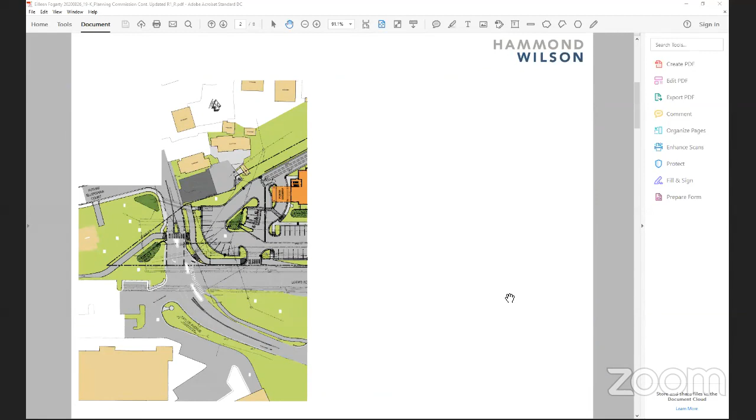Since we last met, this team has been very busy responding to the Planning Commission's comments and questions. As you'll see from these two diagrams, which Terry will go over in great detail with all of you, we've identified all of the pedestrian and safety measures for either option, that is the island or the circle. Terry will walk through that with the entire commission so that it'll be very clear.

He will also be responding to the stormwater management and pervious paving questions raised by the commission. And we have also added a condition that will enable the planning staff to work with the applicant on the details should the circle move forward.

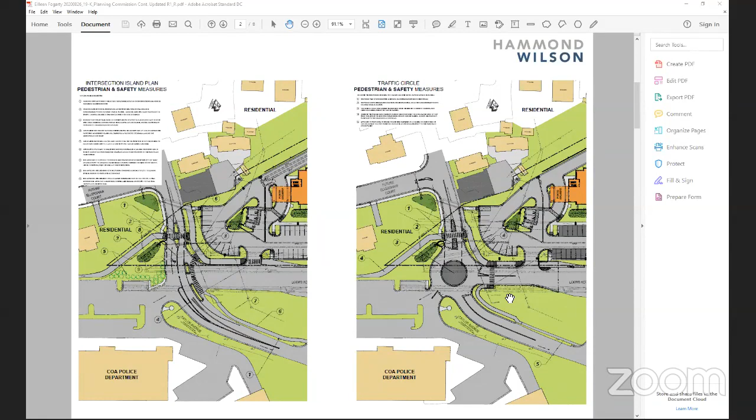Terry, slide number 3. On this slide, you see the image that you've seen before on the bottom, and that is the transition. The reason we have that image is to remind all of us how we got here. We have several letters of support from the community, including one from Bike AAA, from Jon Korin, the president, making specific recommendations, all of which we will be incorporating into the project.

We also have a letter from Mr. Erber, and both Terry Schuman and I will be addressing his comments. But as the commission looks at the public support for this project, it really reflects the very early commitment by the applicant to go out into the community and meet with the neighbors and the adjoining properties.

And also we had a widely attended community meeting last October. But I think the most important issue, for the commission's consideration in the future with projects, is that the applicant and the city work together to redesign the project as your comments and the community's comments came in. The entire project was redesigned, and after it was redesigned last fall, extensive changes were incorporated to reflect what we heard from the commission, the community, and the planning department. We will continue through development and construction to work with the community in the same kind of relationship.

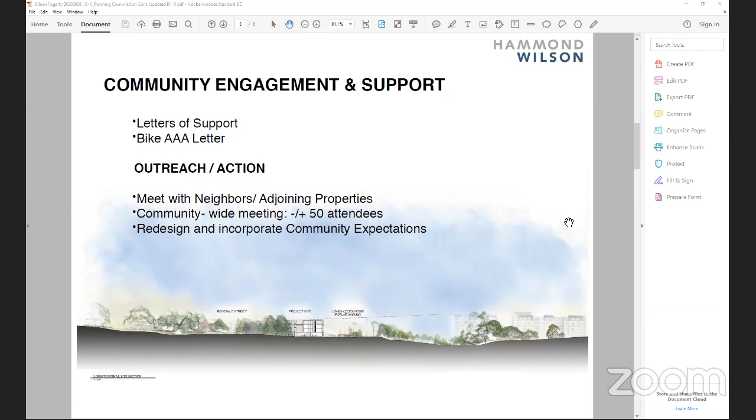Next slide, Terry. As a result of these ongoing efforts, what you have before you tonight is a project that has a compatible land use, that is, first of all, in full compliance with the comprehensive plan. It meets, and in most cases exceeds, the planned development and site design requirements, but most importantly, it meets the community expectations and benefits. To respond to one of the letters we received today, I wanted to borrow from the comp plan language: respect and enhance the character of the surrounding community.

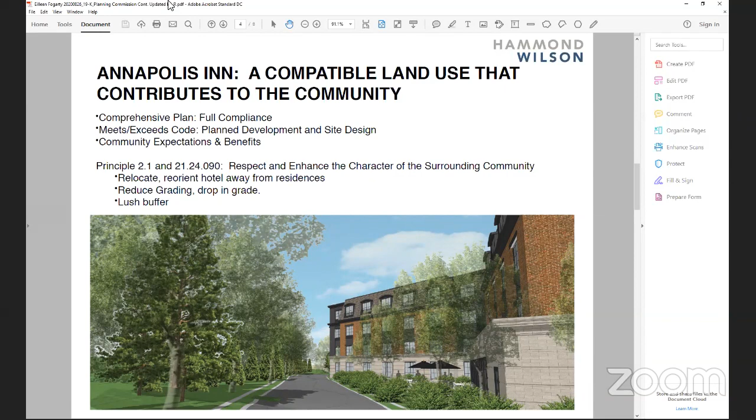Let's go to the next slide. When you look at the next slide, what you see is a 4-story building. The first story and the porte cochere for this building are basically below the level of the adjacent neighbor's street. So what that means is the cars you see there coming through with their lights, any of the activity, that is all below the level, below the grade for the adjacent neighbors.

And as you can see, and Leo spent a great amount of detail with all of you at our last meeting, it's not just the siting, so that you basically have a 3-story building, but the articulation and the detail give us a very human scale building.

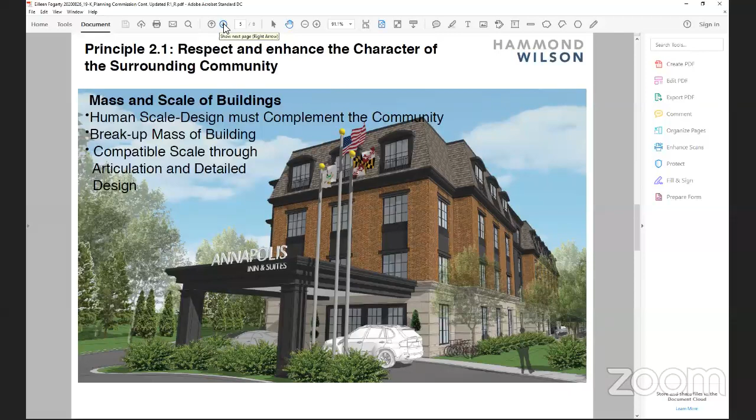Next slide, please. On this slide, we wanted to respond to the overriding issue in the comp plan, and that is for a sustainable future: economic sustainability, environmental sustainability, transportation. From an economic standpoint, this site is an underutilized infill site, and the hotel will offer the city the maximum revenue from lodging and property tax, $500,000 a year.

From an environmental standpoint, we have a project that currently is on a site that has no stormwater management. This will meet, and in most cases exceed, the stormwater management requirements, with treatment of 98% of the impervious area. But it also, if you recall, from an environmental or visual standpoint, we will be undergrounding the very large BG&E utility line. Next slide, please.

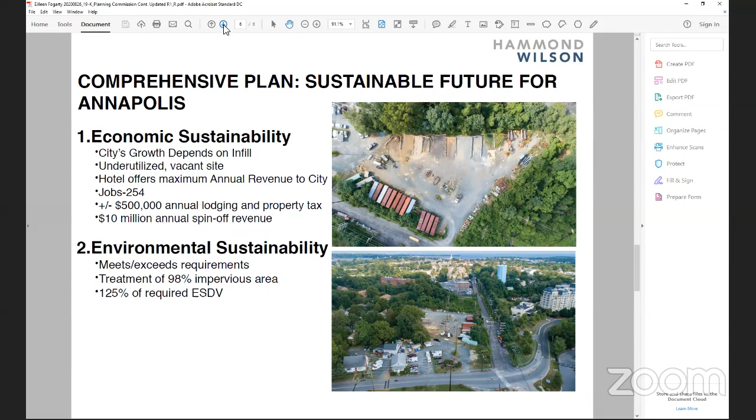The project's one of the most important features is that it supports and improves the transportation network envisioned through the comprehensive plan, the bicycle master plan, and the recreation plan. You're going to see in detail in just a moment from Terry: sidewalks, pedestrian activated signals, crosswalks on Taylor, safe connections to Poplar, and very importantly, speed reduction and improved traffic flow through either the circle or the island.

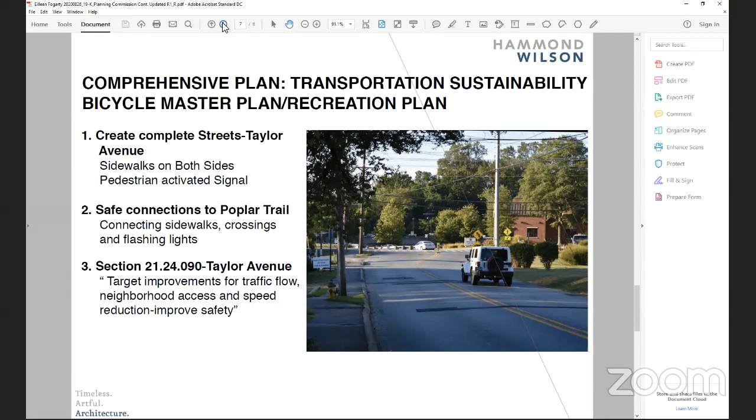And the last slide. So in conclusion, what we would like for all of you to consider is that this project will benefit the entire community. It benefits it by investing in Annapolis's future and creating, first of all, a successful transition from residential to commercial, and secondly, a proud gateway. Thanks very much.

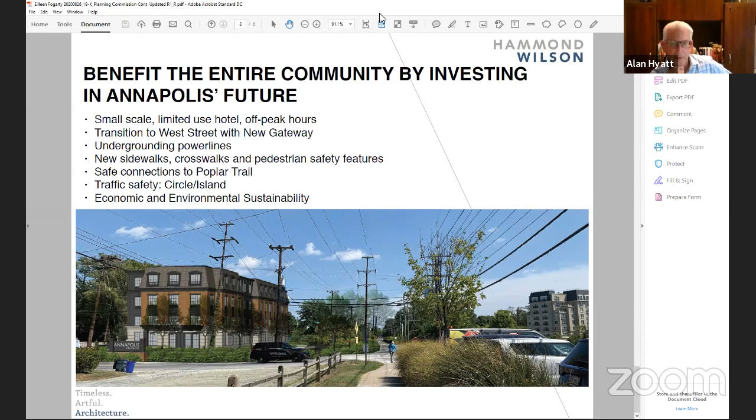I do. Thank you. Thank you, Eileen. So, Mr. Schmid, you recall that at the last hearing, we proposed 2 methods of mitigating traffic, right? We had the island plan, or what I call the alternative plan, or the roundabout or circle, right? You recall that?

Terry? Terry, you might be muted.

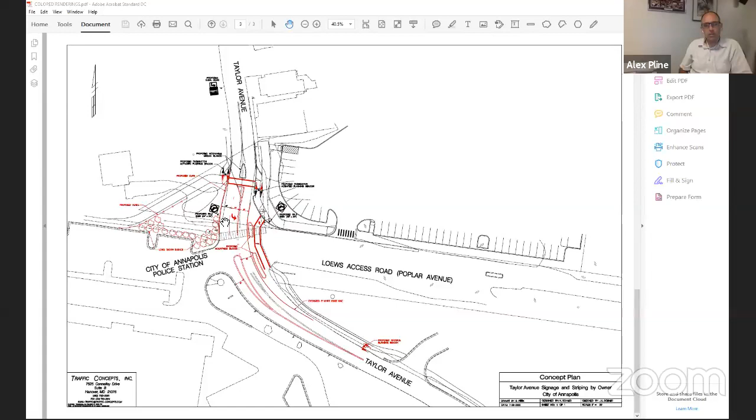Question: going back to the circle plan, the cut into the parking lot doesn't have any striping across the trail—is that an omission? In the island plan, going back one more, it has striping across, so I assume that's just an omission and the striping would be there in either plan. Response: Yes, we would provide striping. The circle plan was an early plan, and then we went to the intersection plan, so it was omitted. That's fine—just wanted to make sure it was an omission and not something intentional. Not at all.

So, Mr. Schmid, one item I wanted you to address before we finish: there was some discussion at the last hearing about the volume of asphalt on the site compared to concrete or even permeable pavers. Could you discuss how that relates to the site and proposed stormwater plans for this project? Yeah, absolutely.

Early in the design we looked at alternative options for pavements and stormwater, and we were looking at permeable pavement in this area. But as you can see from the aerials, it's a compacted urban land complex—the soils are very compacted, with very little infiltration at all. So, working in conjunction with DPW and the stormwater management engineer, since we couldn't get permeability on this site with permeable pavement, we ruled it out.

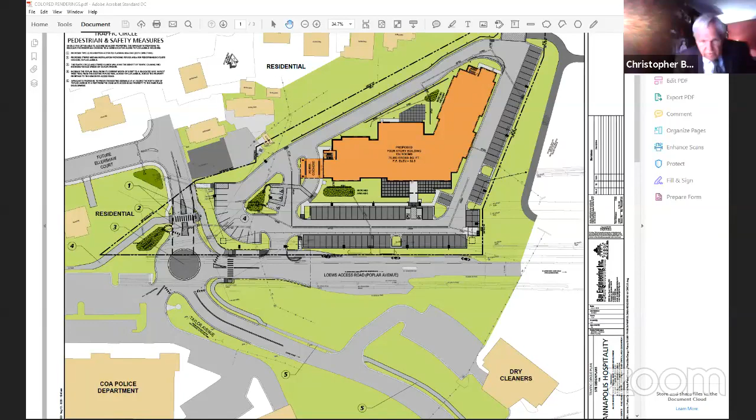And the amendments are not so major as to require a public comment period. Right, and they've been given adequate notice for tonight's presentation to the public. But they're not allowed to make public comment against these new items. But the items are minor in nature, as Mr. Baldwin alludes to.

Mr. Hyatt, do you know of any reason you could not wait till the 23rd, I believe, which would be the 4th Wednesday in September? Or do we meet on the 30th of September? I believe it's the 23rd. So that'd be the 23rd or the 3rd. Those are the 2 options we're talking about right now. The 3rd being in another week and change, and the 23rd being 3 weeks after that. Mr. Hyatt? Mr. Chairman,

I can't think of any reason why you couldn't vote on it tonight. It's not unusual to have changes made throughout a process, and it's not like we've come up with new concepts. There were 2 options proposed throughout this process, the circle plan and the island plan, and we just added a few features, pedestrian enhanced features. So I think Mr. Beard agrees, there's no need to delay. Can we wait to the next meeting? We could, but we would rather not, because this has really been a lengthy affair up to this point. So my request would be that you proceed with your deliberations tonight.

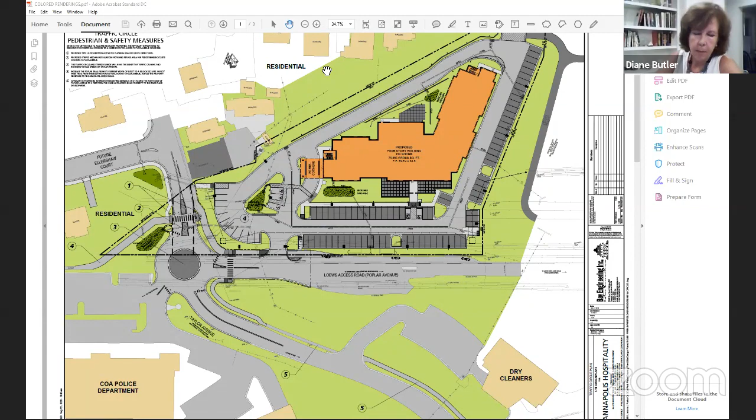And then my other question is, did you talk to the city stormwater engineer about the prospect of using permeable concrete or permeable pavers? A lot, yes, very much a lot. And does he concur that because of the compact nature of the soil, the D soils, that having permeable concrete or permeable pavers would not work? I pushed very hard to get permeable pavement. There's a little bit of a difference of opinion between me and him on it, but he is dead set against allowing us to do permeable pavement. So we tried.

Okay, great. And then the other question I have came to my attention just by reading the comments from Rick Erber, and I thought we had dealt with this, but now I'm not sure. There will be a sidewalk that connects from the crosswalk in front of the hotel up to the Naval Academy Stadium, correct? No. No.

No, there'll be a sidewalk. Do you see the screen? You do, right? I do. We have a sidewalk connection, and we have a frontage sidewalk that connects up to the existing sidewalk along Taylor Avenue. So, well, there's an existing kind of minimal sidewalk.

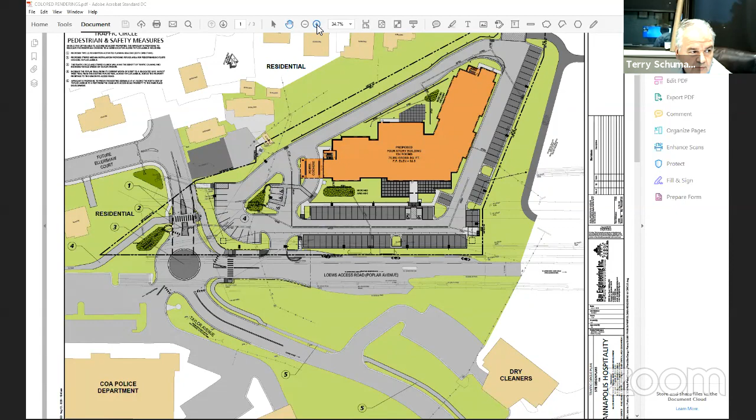We will connect that sidewalk to the trail on the west side of Taylor Avenue. But the Terrapin Station, if you look at my screen, they're providing a little curb return on a sidewalk, and that's all they're providing. Oh, wow, that's pretty insufficient in my mind. If there's one public benefit you could give us right now, it would be to work with Terrapin Station to make sure there is a nice wide connection between your hotel and the Naval Academy Stadium.

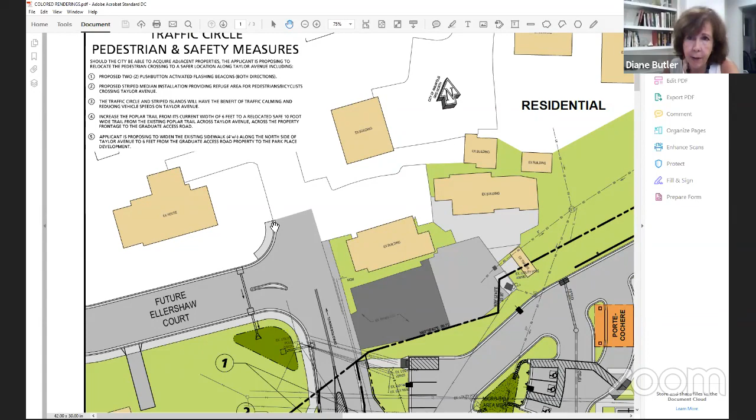I'm sorry, I thought this was already in the works and was done. It wasn't until I just read the comments from Mr. Erber that it came back to my attention. He says, we would like to see a more comprehensive plan integrating pedestrian flow to the funded, constructed areas by both developers. Such a gesture of goodwill for the benefit of the communities in which they are building will speak volumes to their commitment to the community. Eileen is very much aware of public benefits and how we need to start building them into these developments, so maybe it's not too late for Eileen and the team to readdress this, because I do think it would be an important gesture, and for safety purposes, a good idea.

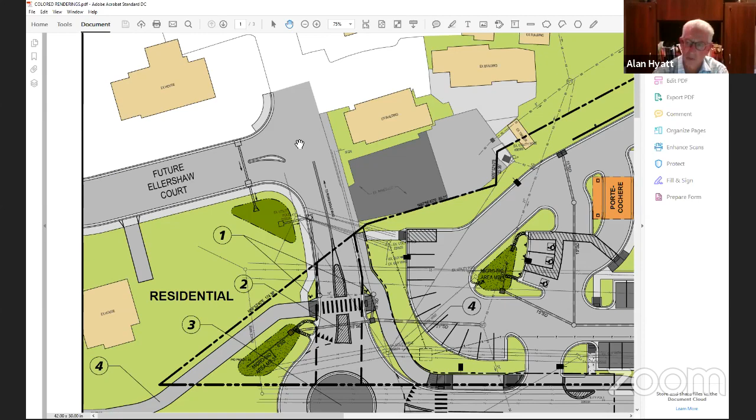Alan, if I could respond to weigh in. Go ahead, do you want to explain about the financial contribution we're making? What the applicant agreed to do was make a very significant financial contribution to the city, and out of that contribution, there would be improvements. This is in addition to everything you see. Everything that Terry has laid out and Ken has laid out is going to be built.

In addition to that, the applicant, if the circle did not go forward, proffered a sizable amount of money to the city, and out of that, the city could make improvements. My understanding, but Alan can address this better, is that this is someone else's land. The applicant has proffered money to the city. The city, theoretically, if they wanted that sidewalk and could not get it from Terrapin, could build some of it out of the money the applicant has proffered. But the applicant is not in a position to go and build something on someone else's land.

Alan, is that a fair summation? That's right. Part of the APF requirement is that there be this financial contribution, and the idea was that it would go toward sidewalks. But in order to install sidewalks, there are several parcels between the Terrapin Station and Cedar Park Road that would have to agree that the sidewalks could be installed on their property.

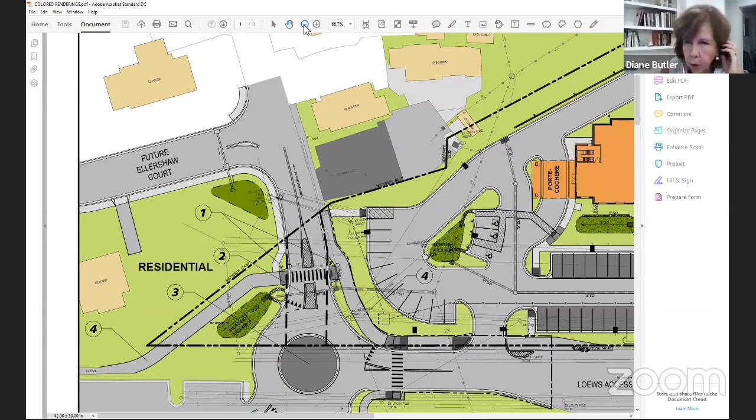And Mr. Hyatt, did anyone approach those property owners to see if they would agree? Diane, hold on a second, this is the chairman, I've got to step out for about 3 or 4 minutes.

So like a small amount? We didn't do that, I don't know if the city did or not, but we contributed money, or will have money contributed, that will go toward the construction of those sidewalks. Can you tell me the amount of money you plan to contribute? I think it was $25,000. I'd have to take a look because it's based on so much per lineal foot of sidewalk. I think that's what it was. Alan, it was $20,000, and that was an estimate.

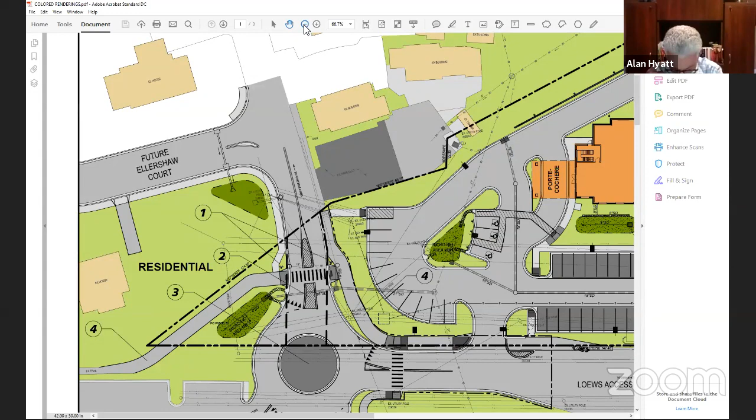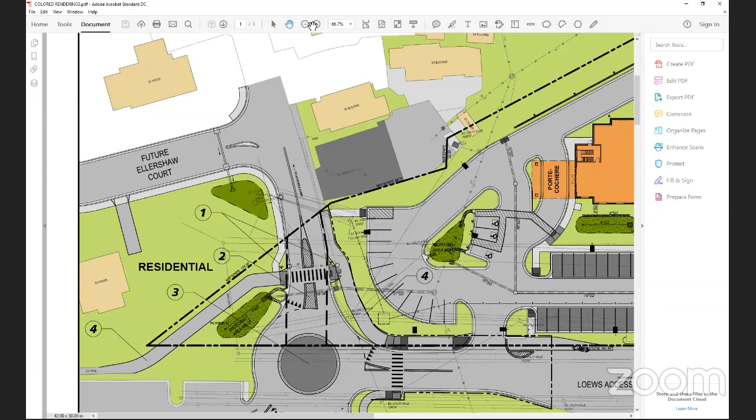That's for the sidewalk, this is Eileen. In addition, there was a large amount of money if the circle did not go forward that would go to the city, but the amount the sidewalk would cost was $20,000 to $25,000. That's right, it was estimated at $20,000 to connect from the end of what Terrapin, what is it called, Terrapin Station, to Cedar Park.

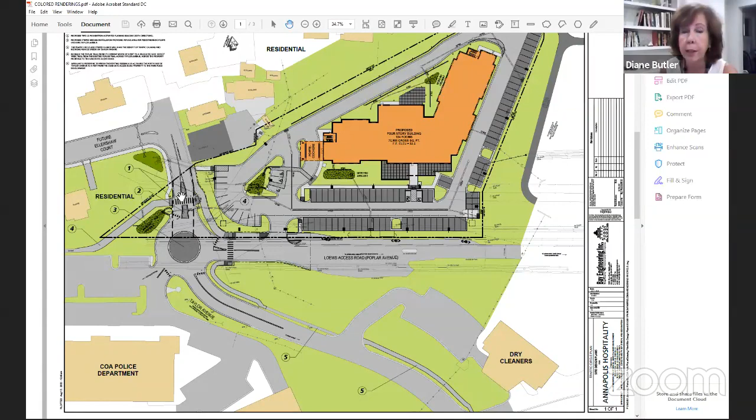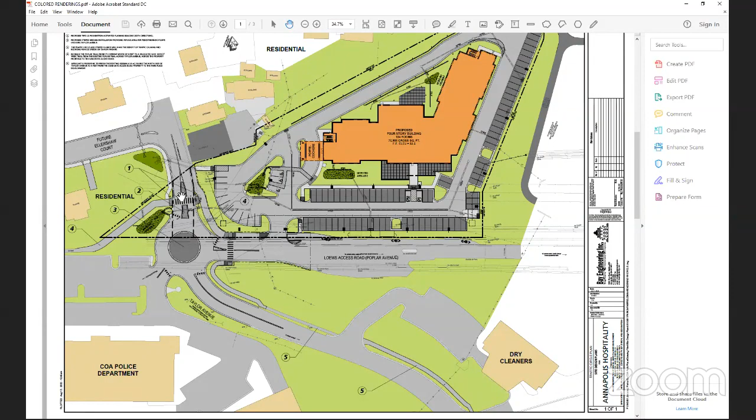So Sally, you think that $20,000 is an appropriate amount to build that sidewalk, and you think the money is going to be dedicated for that? It's just that we're not requiring the developers to do it. That money won't be diverted to another project by DPW? Is it earmarked for this, I guess is what I'm saying. It is, the purpose of the money is to fund acquisition of right-of-way and construct the sidewalk for that section of Taylor Avenue.

Okay, thanks. So while we're on this subject, what are the conditions to this financial contribution?

So Bob, it's in their adequate public facilities mitigation plan, attachment D, and there are no conditions on that particular one that I see. Just that the developer shall fund the acquisition of right-of-way and construction of the sidewalk, provide the pedestrian activated signal, and provide a clear connection for the extension of Poplar Trail in cooperation with the Department of Public Works. Those are their non-auto transportation adequate public facility requirements. And that's in either event, Island or Circle. Correct.

And is the amount specified in the attachment? Yes, in attachment D. D as in dog, and it says up to a maximum of 25? No, it says $20,000.

Thank you. That's all the questions I have on that subject.

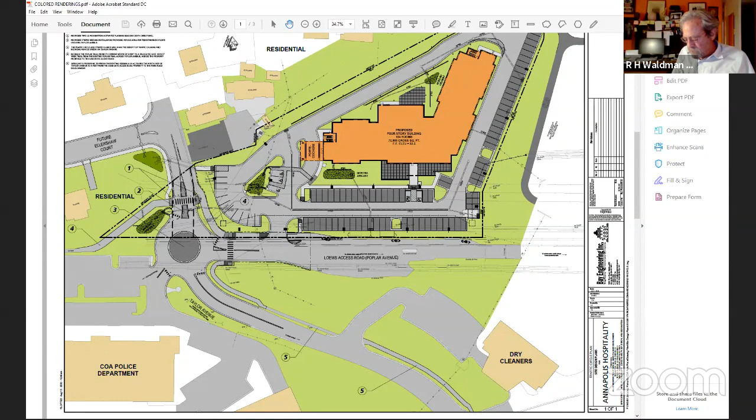Whoever is in charge of the evidence on this, and perhaps Mr. Hyatt, you do that, and you would send it to Ms. Hook or through Dr. Nash or Mr. Smith to see that that is corrected, because I think it's going to become part of the record, and I want to make sure that's clear, okay? Yes, sir, I'll take care of it.

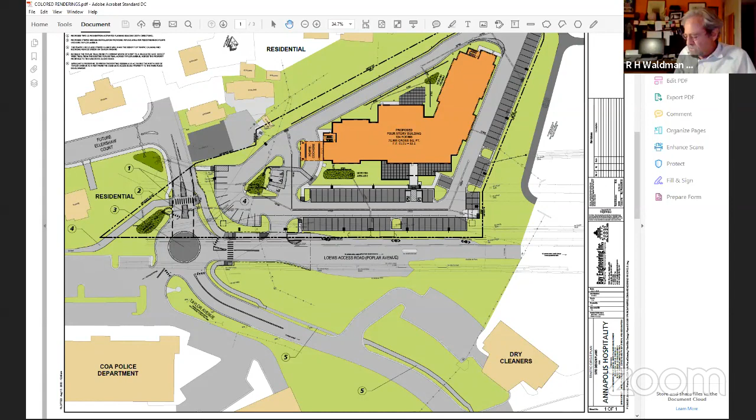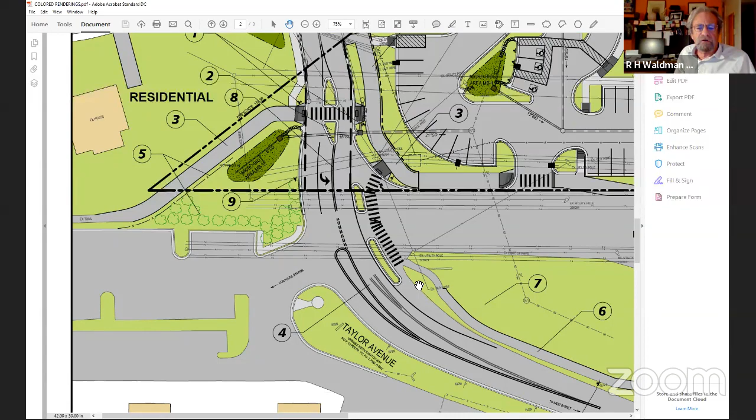Following up on that same topic, left turn lanes out of the access road in the event of the island plan—let me see if I can understand what is there to prevent or provide significant negative reinforcement here to stop left turns out of the access road. What is there to stop people or delivery trucks from just veering in between those two islands and making a left?

So the mountable curb, the northern of those two little islands, right? To what extent can that be extended or expanded further into the right-hand lane on Loews Access Road? Can it be extended further out? Probably could. We'd just have to run checks to make sure vehicles don't have to run over the mountable curb. We don't want to make it too narrow that they do it really slowly and wind up getting hit, but we could look at making that a little bit longer.

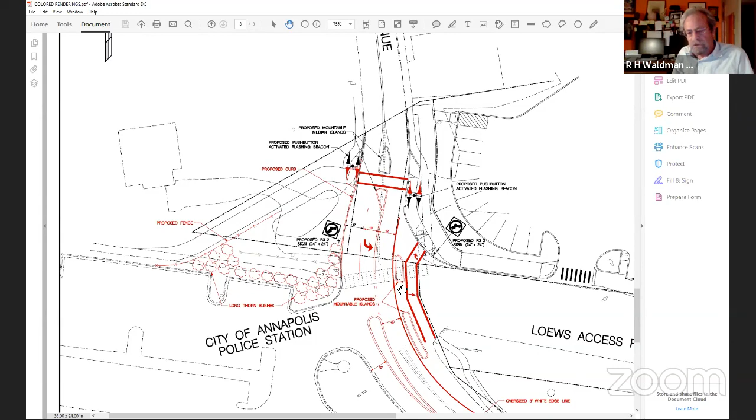Now, if I could, Mr. Schmid, and both of you—I want to applaud you for the installation of a third pedestrian activated signal further down Taylor Avenue, further down the hill towards West Street. I have my fingers crossed that it can be connected by, I don't know, Bluetooth or radio or something, rather than having to run a line. Although I do note that you're changing the sidewalk, so maybe you can do that at the same time. That's up to you, but I really applaud you for that.

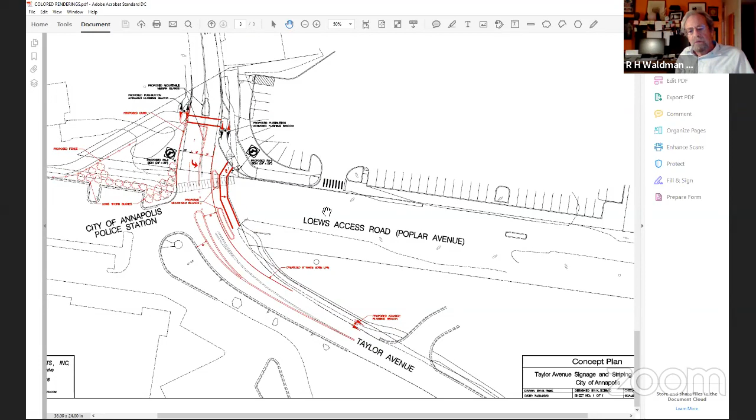What I question is its placement. I am not a traffic engineer, but common sense and my intuition tell me it might be better placed further up the hill rather than so far down. I could argue it both ways, but I'd really like you to consider the efficacy of putting it further up the hill.

I know, we can look at that. It really is based on speed - depending on the speed, you put it back from where you're trying to warn of the crossing. But I think we could move it up the hill a bit from here. I just think it should be placed in its best spot. It strikes me as way down the hill - somebody coming up sees that flashing light but doesn't see anything around, you know what I mean?

That's the one thought on the light placement. We'll have a sign on those light standards that say crosswalk advanced 200 feet or whatever. I understand that. It becomes a little difficult though, because if we approve this according to the drawings submitted, I don't want this to be necessarily set in concrete, whereas I want other things to be set in concrete.

If I can follow up on that, Bob - just for Mr. Schmid, I think the spot Bob's referring to, there happens to be a no parking sign which would be on the hill. That's a good reference point for where it just intuitively feels right. Okay, give that a thought.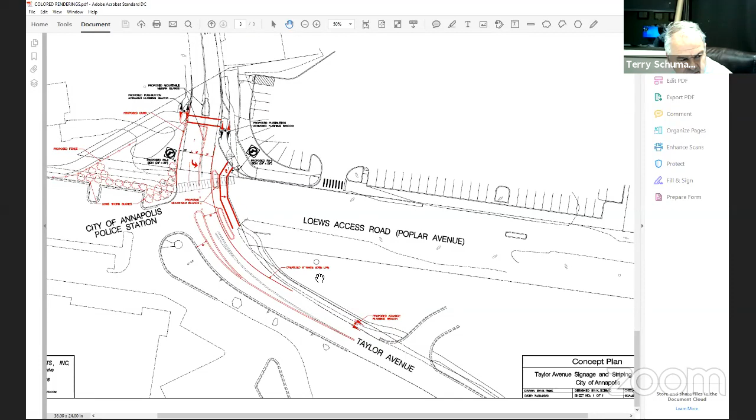Are you going to be grading or doing anything further down that way? We're really grading - if you're familiar with the area - this area up in here. Okay, how expensive would it be to relocate that sidewalk 5 feet from the curb? Just money, it's not an exorbitant amount. I think it was built in the beginning too close to the curb.

It's a detail that escaped us when we approved Park Place, and it's something I would really like - personally I'd like to see it moved off 5 feet. It's really close to the road, it's very uncomfortable.

Okay, what would we call that sidewalk? Taylor Avenue sidewalk - buffer. I don't want it to be confused with the Taylor Avenue sidewalk over the top of the hill - be called a grass buffer. But what do we call that stretch? Taylor Avenue sidewalk, access road to West Street, southeast side. Okay, 5 foot buffer. Okay, all right.

If I could move on, I want to applaud you for several things you've done which I think are excellent. I'd suggest you consider not only a fence at Taylor Avenue for the potential shortcut for the path, but also a fence that runs right alongside the path. It need not be a major fence - it could be the same kind of post and rail that's even up there now.

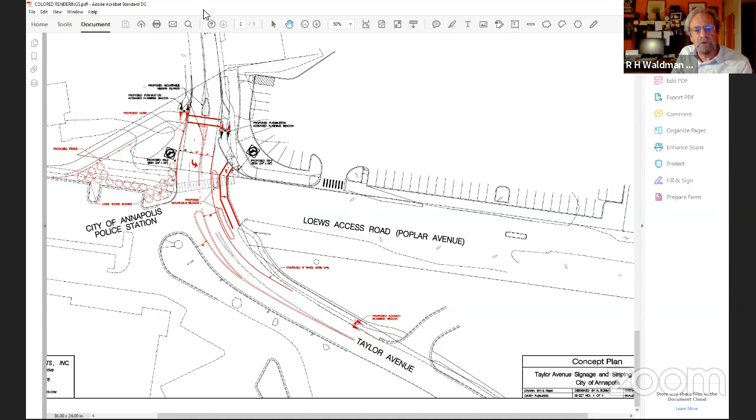Need not be expensive, but I think as much as possible we should divert people from trying to make the shortcut. I applaud Ms. Schwab's choice of probably pyracantha or rose bushes or something that'll stop people from coming through. But as long as we have to live with this 25-foot distance or however many feet it is, this diversion - I think we really need to make the point clear. So I'm going to suggest and move that there be an additional fence along the pathway.

And I guess, Bob, just look at the cursor. So we were proposing a fence along Poplar. I probably didn't explain that well. I missed that. I thought you said only along Taylor. No, I might have said that, but I should have clarified that we were providing a fence here along Poplar.

So what are you doing on Taylor? What do I see there? Just really long thorn bushes and landscaping. But we could put a little split rail fence or something up along there. As long as you put it off the road, back a few feet. Right, yes, and rose bushes and pyracantha, so.

Okay, Mr. Schuman, thank you for clarifying that. Next point is, who will be responsible for maintaining the lights and this landscaping here across the road, and those are the two most important items. And striping, I guess, over the years. Who's responsible for this sort of thing? Is the landscaper going to be responsible?

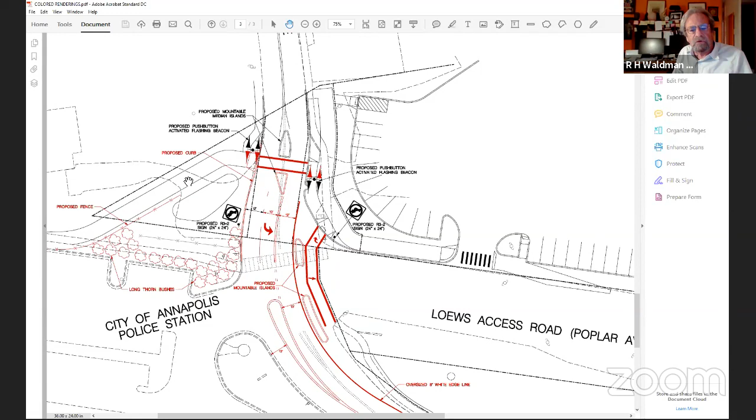Yes. Now, if I could move, Mr. Schuman, if you could give us either of the slides. Hey Bob, can I interject something first? If you're going to vote on this, you certainly want to achieve clarity of responsibility. I'm just making notes, Mr. Beard, and I'll make suggestions as to conditions. I'll move several conditions, okay? Yeah, no, I got you. This is not just a handshake agreement. Thanks for reminding all of us.

The comments from the neighbor, I thought were very well taken and very well spoken. And he's rightly, I think, concerned about lights leaching into him, probably his bedroom, from cars coming into the porte cochere at night.

To me, there seem to be two potential solutions. One of them is to reroute the flow of traffic so that it's clockwise. I don't know that that works, but the second solution might be to actually build a fence along the boundary that will be light reflective or light opaque. I know that you were planning on doing some fencing. It may be that, when I learned tonight from Ms. Fogarty that the first floor of this structure is actually lower than the neighbors to the north, it occurred to me that a fence could be very effective at a fairly inexpensive price.

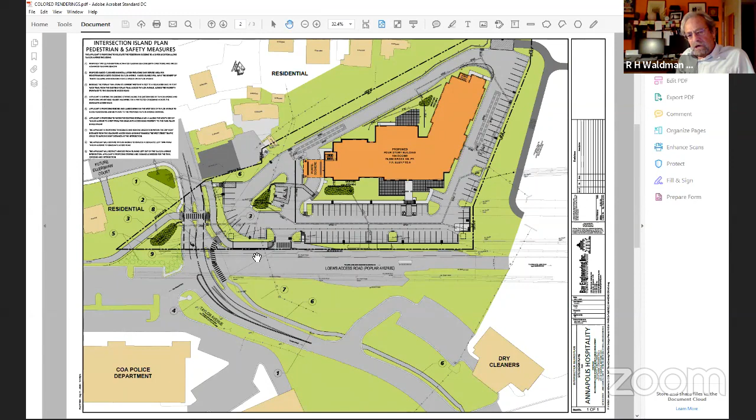Do I get any comments from the applicant on that?

Bob, this is Eileen. Let me explain what you've got. Deb Schwab did a drawing, though we're not in a situation to put it up, but basically the cars are below the level of the neighbor's property, since there's a 7 or 8 foot lower grade there. So the entire car, including their lights, is lower than the adjacent property. Then you add the retaining wall, and you add the buffer.

So it says fence wall. What is that? That's a wall. This is Deb. There's a 4-foot fence on top of the wall, and then there's planting from the fence to the property line. So there are several levels of things going on, if you look at that little diagram.

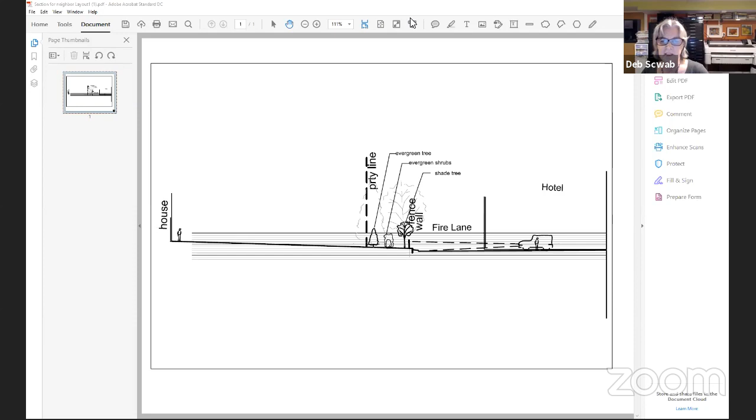From this side view, it actually looks like the first and second levels of the hotel are not below grade, as was briefed earlier. Well, if you look at where the neighbor's house is—this is kind of a compressed scale—the finished floor of the hotel is about 3 to 3.5 feet below the elevation at the base of the neighbor's house, which is around 36. It was briefed that floor, which is around 1 and 2 of the hotel, were below the grade of the adjoining property.

The existing grade at the houses is around 36, and the proposed finished floor of the hotel is 32 point something. And the lowest grade of the houses on that street is 36, correct? The backside facing the hotel—I don't know what their finished floors are, I just know the grade at the backs of their houses is around 36. So that's the lowest grade of all those houses, right? That's the one, but I can't point.

Terry, you can point to the one where I did the section. Can I just interject for a couple—sure. This is Mr. Erber's house right here. There's another residential house here. This is Heidler's Plumbing Supply. So the house that wrote the letter is this house.

Uh-huh, and a long time ago, this was our entrance to the hotel. When we brought Leo on, one of the first things he did was move the porte cochere here, with a right-in, right-out, typical traffic flow for drop-off of visitors. But when we did that, we also extended the wall.

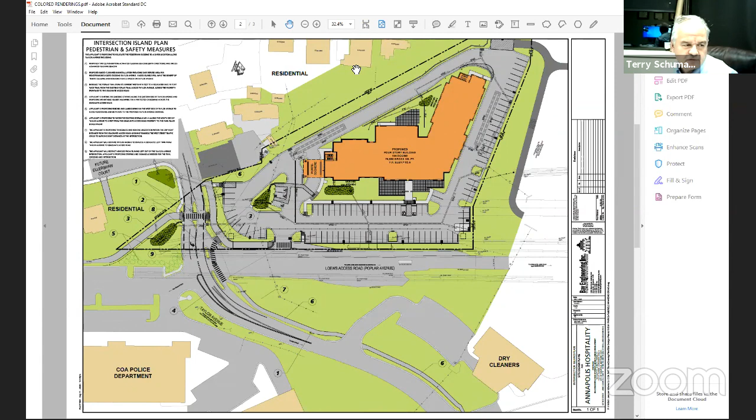We do have a grade differential, and for sake of distance, the point from the house to the porte cochere is about 160 feet. And as we said before, this elevation is probably about 5.5 feet higher than the first floor of the hotel. So the back of the house, where you step out, the rear floor elevation, is about 5.5 feet higher than the first floor of the hotel.

But how high is the wall along the retaining wall, or the fence, pardon me—how high is the fence on top of there? So the wall is approximately 2 feet. It starts at 0 and goes up, probably 3 or 4 feet in the middle, but around this area right here, about 2 feet high.

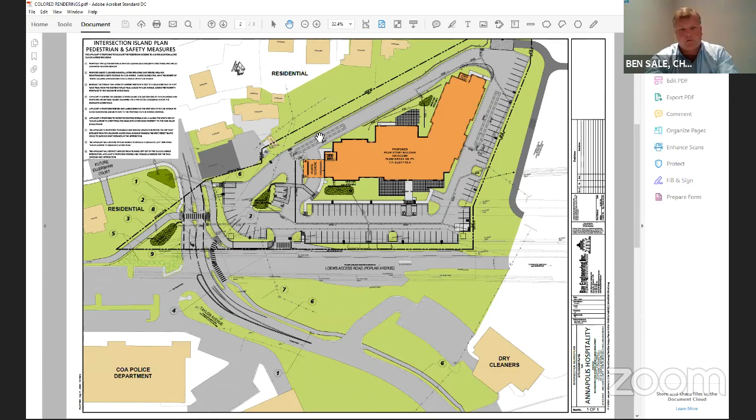Could you zoom into that area a little more? We don't need the bottom half of the drawing, maybe more of the top half—that'd be clearer. And just go right, thank you. Again, the subject letter house and this—so this wall in this area right here is about 2 feet high.

And then on top of that wall we have a 4-foot high fence. What we did—we extended the wall for that purpose where the porte cochere was, to help screen the headlights. We also heavily screened with evergreens and shrubs, not just shade trees, that didn't have any vegetation below the branches. So we tried to heavily screen this for that purpose.

So, okay, and there's a 4-foot fence above the retaining wall. Yes, that's correct, so there's a total of 6 feet at a distance from the porte cochere. I would think a little bit higher than that would be better on that whole side. But after that fence, to the north of it, you've got the green space and then the property line. So at the property line, what else is there?

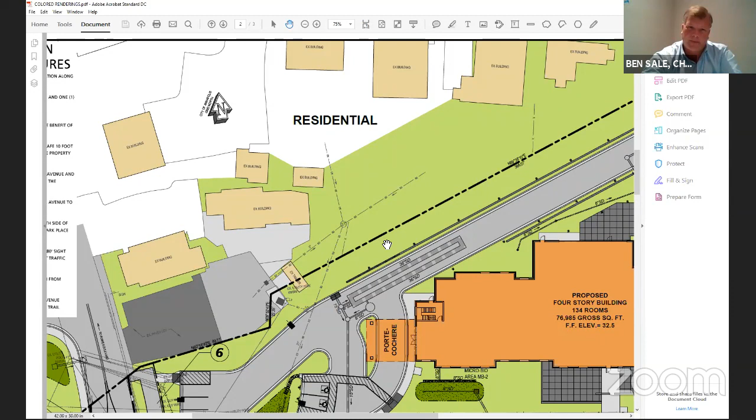Vegetation. It's just vegetation, no additional fencing planned as of right now. What kind of fence is on top of this retaining wall? Have you thought about that?

I was thinking something a little more decorative, not a board on board fence. We don't have an exact detail yet, but it would be a screen type fence.

What does that mean? Trying to block light, it wouldn't be an open fence. Putting a fence along the property line is difficult because some neighbors already have fences on the property line, and there are also existing trees that we're saving there.

What would a 5-foot fence do? It's 1 foot above 4. It would hide all the landscaping that we have going on.

I would just think higher is better in that regard, but if you guys have looked at it and feel otherwise, especially when you have 2 feet below the adjacent property.

I don't want to go over you, Mr. Waldman. I want to let you finish first before I make my comment. No, actually, I think I'm done. I appreciate your patience.

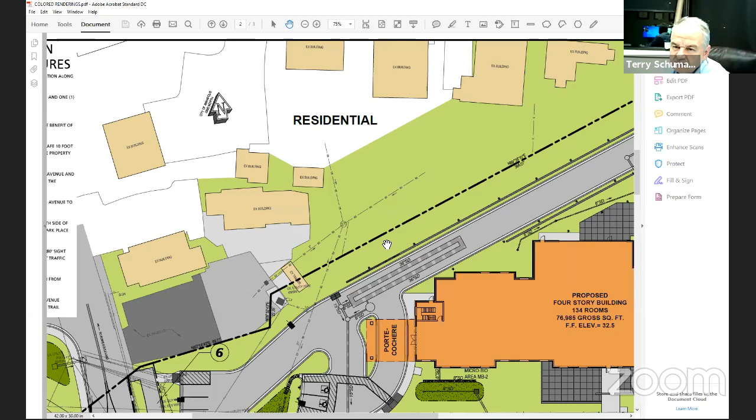So concrete would reduce your need for lighting at night and reduce the amount of heat maintained by the pavement and radiated at night, making it a very hot parking lot during summertime. We don't have anything in our code that stops you from putting asphalt. I have to say, from a design perspective, if I owned the property I would definitely go with concrete versus asphalt, just for the heat perspective, let alone the pollution perspective of needing to recoat it. I've just seen it too much.

I know you have stormwater management procedures in place, but the slow leaching of asphalt over time off these pavements - I've seen it a lot on West Street on properties done near Spa Creek, even the old school buildings, and it's quite disheartening. So I know there's a chance to change it, but also the lighting - since you have asphalt, you will need a decent amount of lighting. I wanted to go over the lighting on the north side of the property that abuts the residential area.

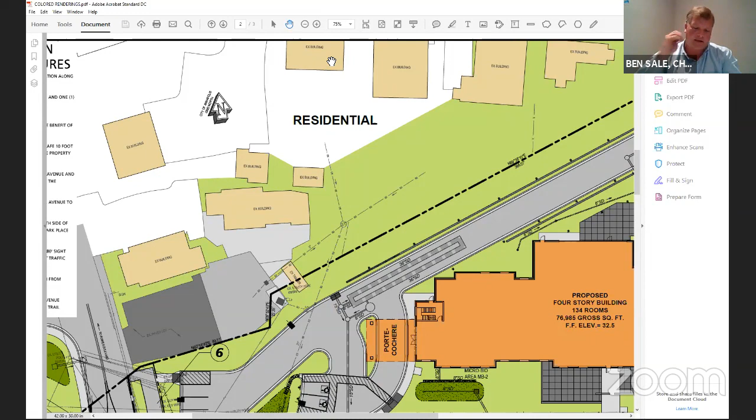I know you've got a lot of trees that will stop some of that lighting. Can you tell me how high those light poles will be and where they'll be located? Also, will there be lighting on top of the building pointing down towards the north side?

From a lighting standpoint, you can see these darker rectangles - these are the tall light poles with downward lighting. Up along the residential area and along this area, those lights will be - Deb, you can weigh in - I think they're 3.5 to 4 feet high, just kind of pedestrian lights. Yeah, those are what we call bollard lights, more typical of what you'd see along walkways. You've probably seen them, kind of waist height lights, and the fixtures on them are meant to light down as opposed to up.

Is there any lighting on the top of the building facing the green space between the building and the northern road? That's for Leo. Deb, I can answer that. We don't have any building mounted light shown on the design right now.

I don't anticipate a need for it. We try and handle the lighting in accordance with LEED guidelines, which says we should light the surface and not the area around it. So most of the lighting on the building, if necessary, would be down at around the 8 foot mark.

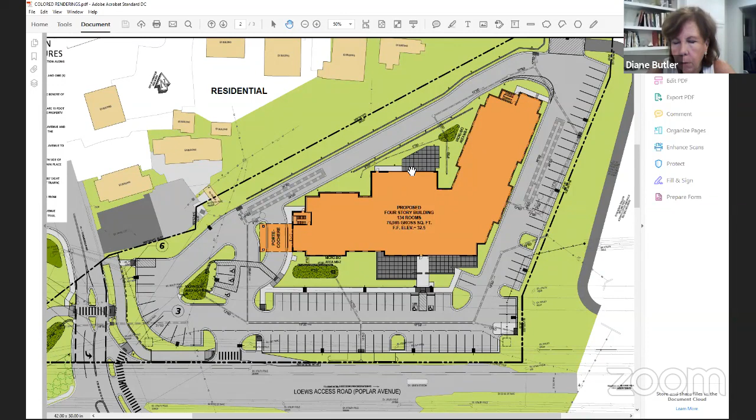Well, Commissioner Butler, it's a good question. What we see happen oftentimes is people can lease the rights to use the roof to companies that want to install solar. Again, it's about what's left over there for us to actually do up there. I've got to put the mechanical equipment up there.

We have not been finding solar to be financially effective for clients unless it's subsidized somehow by government programs that provide some type of incentive to do it. So, could we do it? Sure, it's a possibility. The reality is that unless the economics work at the time this is actually built, it's hard to say whether or not that's going to make sense for the owner.

But Mr. Wilson, are you going to build it in a way that solar is an option? Oh, sure. The TPO roof product that I described earlier is one where we can easily attach things to the roof through the membrane and make it watertight. So certainly the possibility, should someone decide they want to go ahead and do that, can be accommodated.

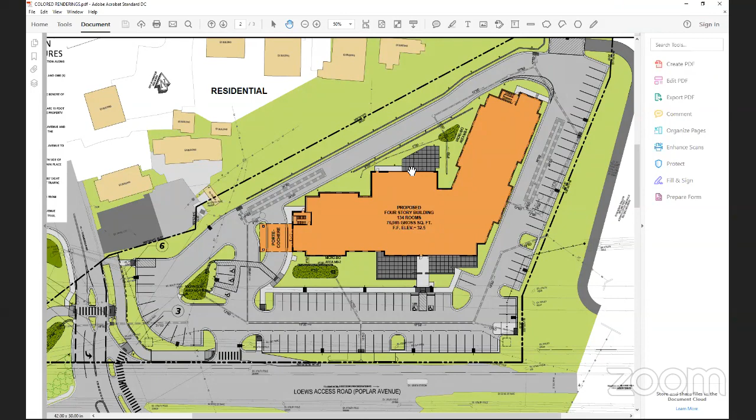Before you start to summarize, I'd like to bring up a new topic. Okay, what's your new topic? We still have to get the comment from Mr. Herbert displayed. So should we do that first or yours? Well, I think just to continue on with the discussion of commissioner comments. Okay. So I prepared a little document with a visual to share. Would you like me to show that, or are you going to show that? I can share it. Go ahead. Thank you. You got the floor.

Okay. So the thing I wanted to bring up is with respect to the easement on the south side of the property. So currently in the plan, there's an easement for the trail that runs essentially a little bit past, I can show in the visual here, a little bit past the curb cut into the park to the property.

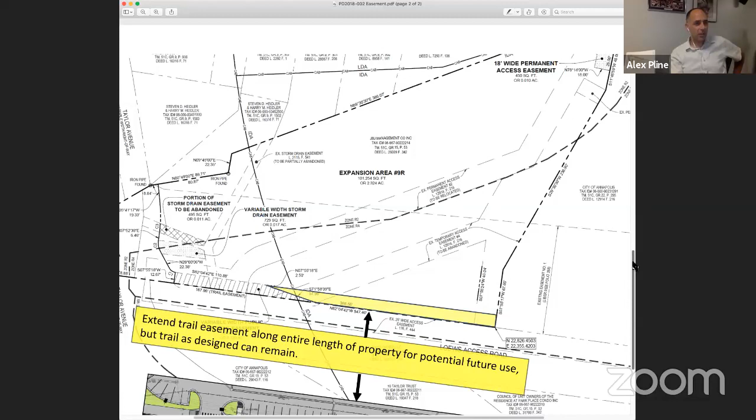So the thing I wanted to mention was, in our experience with working with the city and the county in implementing their bike master plans, most of the implementation of that kind of thing is retrofits in the built environment. And the biggest challenge is that there's often no right of way to do that. So you have to spend a lot of money to buy right of way, if you can even do that, because there are very few easements available. As we've experienced a lot of infill and greenfield development, because there's no existing trail or plans or nobody's envisioning anything, there's often never any easements built into the development. And then later on, when something is envisioned, the window is closed and you're stuck having to buy right of way or do very difficult, costly things.

And I view this project as one of these opportunities. Somebody check their mute, please. Everyone check their mute. Thank you.

So I view this project as one of these opportunities where on the south side of the property, you've got an easement that goes partially down the property. And I think this is an opportunity that we should have the easement along the entire south side of the property. Even though the existing plan shows the trail going out into the Loews access road, and that's fine, I don't have a crystal ball, I don't think anybody else does. And we have no idea what's going to happen with the rights to that Loews access road, and what that's going to be in 20 years. We don't really know.

So I think it's really important that we make the entire easement along the south side of the property, because I don't want to look back on this in 20 years and have the city try to do something and think about what were we thinking at the time, why didn't we do that? That would have been easy, but now you can't do it. So this is the right time. I made a little visual here. The hatched mark is the part that is going to be an easement, and then the trail comes out into the Loews access road, and that's fine because it's a low traffic street. But what I'm proposing is that this whole area be granted as easement and marked in the plat. I'm not proposing that the existing site design change at all.

The trail as designed in the site plan is fine, and along that easement right now in the landscape plan, there's plantings and various things. So I'm not proposing any of that change, just that this entire swath, about 10 feet, be

granted and marked as a public easement in the plat for future use. And in 20 years, if it's not needed, it's not needed, but it's recorded in the plat for use if it's ever needed. So we don't kick ourselves later saying, why didn't they do that? So that is my proposal.

I would like to do this, and I'd like to give this document to go along with the record. So that's something that when we get to that point, I would like to propose this as a condition.

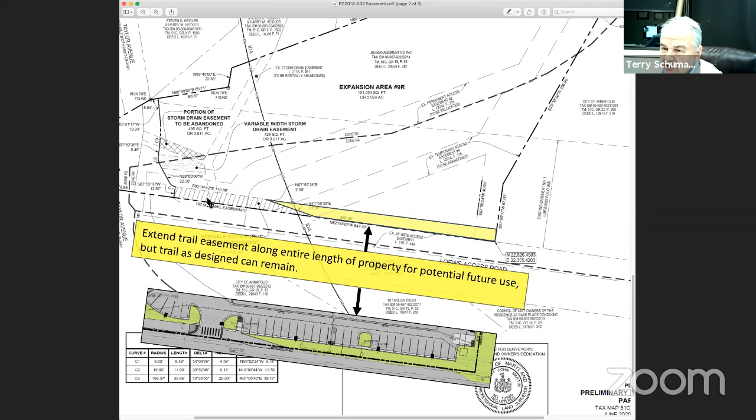Beyond our property, it's just a steep slope down to the pond. So that trail, if extended beyond that driveway, eventually has to go over to the Loews access road, because the pond area slopes off drastically where it would be extended if you continued the easement through there. So the idea was to get it over into the Loews access road, because I don't think you can build a trail easily beyond our property line in that alignment.

Again, that's all in the future, and who has a crystal ball? Doesn't seem to hurt or add cost, would it? No, it adds no cost.

It adds nothing other than a change to how the plat's written, and making sure everybody's in agreement with what the language says. But there is no material difference to the site plan. I don't see any problem with that—that's a key point. I'm not requesting any change to the site plan.

Well, whatever we do, and I appreciate the desire—I think it's a lofty goal, a worthy goal. I get that, but we have to be careful about putting things on plats. We're going to deal with lenders. We have to be careful. So I don't know.

I hate to craft some language right now, but maybe we can work it out with Mr. Beard in some fashion, some language we can agree upon. I'm not asking that language be developed tonight. I think we'll have an opportunity to come back and discuss this, at least in some way, at our next meeting. So there's some time to go work that out.

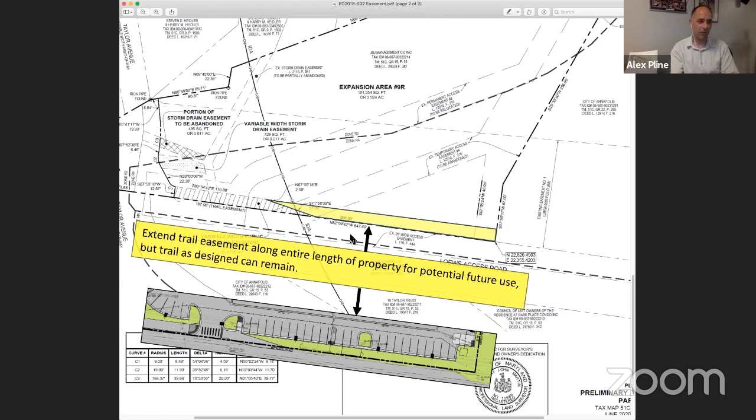What does the applicant think about having time to think about this and look at it before it's voted on? Well, what I think is you could approve it subject to the condition that we work out the specific language with your counsel. It may be a condition in the plan development approval, and we put a note on the plat that refers to that, so there's an obligation to execute the easement in the future upon request or something like that.

If you look at the last paragraph I wrote, or next to the last paragraph, I think it's really important that this get recorded prior to our signing the plat. This has to be on the plat, because we all know these handshake agreements might last through one property owner, but as soon as some time goes by, water goes under the bridge, properties change hands. Look at the entire right of way of the WB&A Railroad. All of the history of that right of way is gone because it was all done unofficially.

So I think it's important that we don't treat this as a handshake agreement. I agree. I would not ask you for a handshake agreement, they're not really worth anything. But it occurred to me that you would be approving the plan development and the preliminary plat. You will get the final plat that will come before you. At that point in time, I think we can have the language that's appropriate. That would be my suggestion, so we have time to figure out the right kind of language to put on the plat.

I agree with Mr. Hyatt. I think maybe tonight is not the time to do specific language, but I do think it's necessary that it be written in as a condition, because we have been hornswoggled in the past by things that don't show up on the plats. So I think we could put in a condition generally written, and then review it at the time the final plat arrives. I think we can cover it with a note on the plat, identify the area, so we're not coming up with language we regret, or at least from the property owner's perspective regrets later. So I think that way you get what you want, and we can come up with something that makes sense.

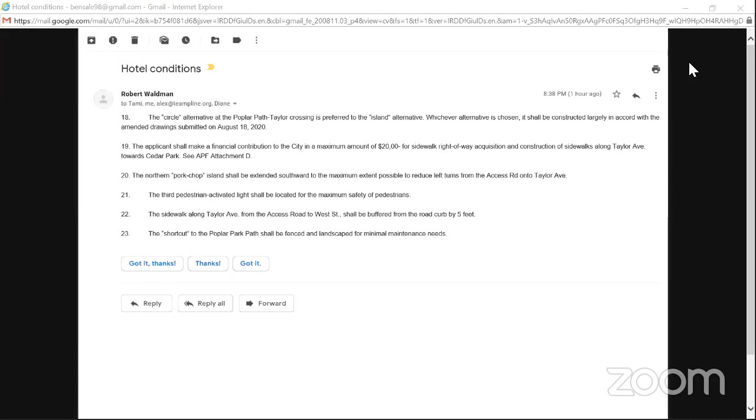The motion on the floor is for approving the project plan as designed, including the changes submitted today in front of the Planning Commission, and conditions added 18 through 24: the preference of the circle, the financial donation of 20,000, the pork chop island extending south, the relocation, the buffer, the 5-foot sidewalk, the shortcut to Poplar Path, fence and landscape changes, item 24, and the easement, which would be put on the plan. That would conclude those conditions.

All those in favor say aye. Aye. All those opposed? Nay. Any abstentions? The approval passes with those conditions.

Ms. Hook, please annotate that. So was it 3-1, correct? Let's make sure on the vote. Mr. Waldman, you were an aye. Mr. Sale, aye. Mr. Pline was an aye.